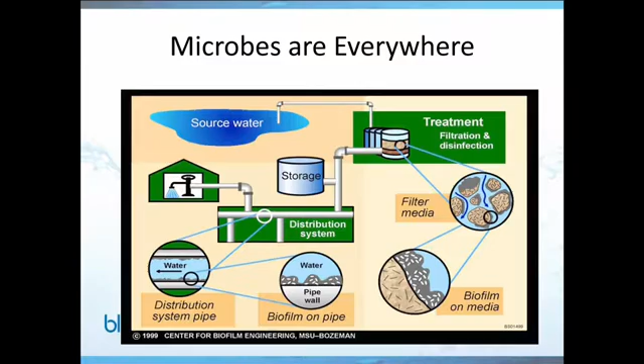But this slide right here just gives you a flavor for where you might find microbiological activity in your system: the filters, pipe walls, any storage systems, and so forth. And so this is really where we want to focus our presentation. So I'll talk a little bit about microbiology, and then we'll come right back to this, and we'll talk about the impacts that the microbiology has on the operation of your system.

Our goal here is to help you understand how to operate your system better and cleaner, so that you can avoid a lot of the problems that microbes present in your system. And you'll find that they underlie almost everything that you do in the water industry, just like they underlie almost everything that happens in the world around us.

It turns out that for every human cell that you have in your body, you have about 20 microbes. So for every human cell, there's 20 microbes. But the microbes are much smaller than your human cells. And so that amounts to only about a quarter pound, right? So you've got about a quarter pound of bacteria and other microbes in and on your body. So that's a lot if you think about it.

200 trillion microbes that you've been walking around with all of your life that you probably didn't even know were there. And there's about 1,000 different species of microbes that are in your own body as well. And if you look at just a square inch of skin, well, you can't see it, but there are on average about 600,000 microbes in a square inch of your skin.

So when you're looking at your distribution system and you think, oh, well, my distribution system's clean, it doesn't feel slimy, there's no overt problems here, I don't see any biofilm or any attached bacteria. In reality, it's all there, you just don't know it.

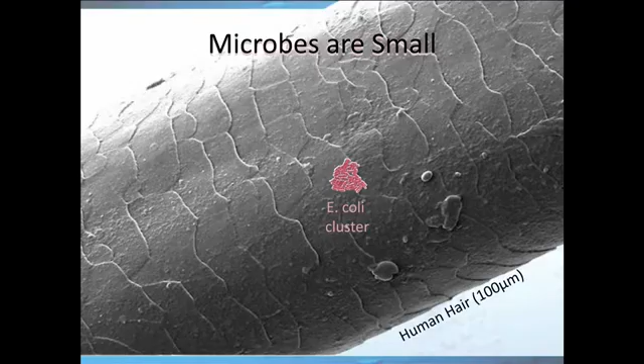So here's an example of the size, since you might be wondering how it is that you can get 600,000 microbes on a square inch of skin. Well, this is the cross section of a human hair. To give you a flavor, that's a cluster of about 100 E. coli bacteria. And so it's pretty easy to see, just looking at the number of hairs that you may have on your hand or your arm, that you can get quite a few bacteria on that surface and not really even notice.

And microbes in general, we're going to talk mostly about bacteria today. And bacteria will form what's called a biofilm when they're stressed. If you have bacteria and you apply a chlorine residual, there's a defensive mechanism which will secrete some sticky substance, and it will allow it to stick to a wall and to each other. It will allow it to protect itself from disinfectants and so forth. And so we see bacteria doing this.

In fact, bacteria can be found in space, they can be found in the deepest parts of the ocean, they can be found a half mile or more underground. If you take all the bacteria on the planet, the weight of it is more than the UK. So it's prevalent. The most common organic chemical that exists on the planet is cellulose, and that's what bacteria actually secretes when it secretes a sticky substance, and it's also what makes the cell wall.

And so this is kind of my primer, if you will, on microbiology. Let's just stop and take a moment and rethink how we think about these processes that happen in our water system, and recognize that microbiology plays a large role in it, more so than we attributed before. And so that's why I like this Mark Twain saying: it ain't what you don't know that gets you into trouble, it's what you know for sure that just ain't so.

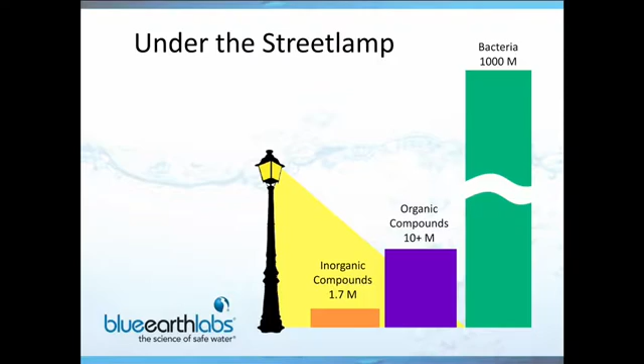And the same thing applies for the 1 billion different kinds of bacteria that's estimated to be on the planet. We have a very limited understanding of how they work, what they do and how they interact with the environment. What we can observe is the after effects of what they've done. For example, tuberculation. If you have iron and manganese in your pipe, you're familiar with these tubercles. Well, that's a phenomenon of bacteria.

Okay, and so you might ask yourself, well, I come up clean in all my tests. I don't have bacteria in my water. I'm not getting any positives on my total coliforms or anything like that. My water system's good, and that's good. From a health perspective, what you care about is the bacteria that's in the water column. And chlorine or chloramines do a pretty good job of taking care of the health problems associated with the water column. But only 1% of the bacteria in your system exists in the water column. The other 99% are stuck to the wall.

They're protecting themselves. They're essentially a little factory working to provide for themselves, and as a result, they have byproducts that they shoot off as well as their own children. So we end up seeing the development of bacteria. They stick to a wall, they start to secrete sticky material, and then they grow and continue to build until finally they're so big they need to send off some of the bacteria to move to a different location. And so this is the kind of operation going on in your system that causes some problems.

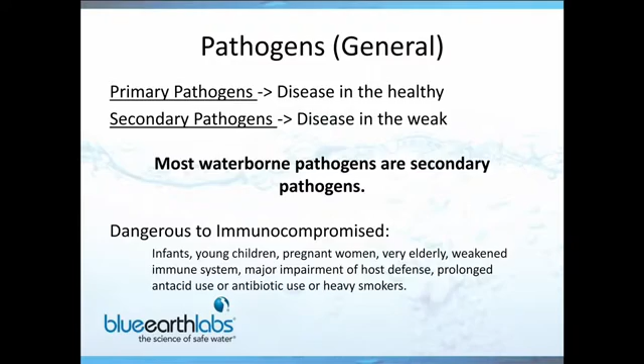E. coli is an interesting bacteria in that we have a bunch of E. coli in our bodies. In fact, we rely upon it to survive. It's what helps us to digest our food. There just happens to be a strain of E. coli that if it gets in your body, it'll tear it apart. And so E. coli is a fairly common bacteria.

Legionella is the same way. Legionella is all over the place, and there's one or two strains of Legionella that if it passes through your system and gets into one of your customer systems that has a hot water heater, then it can begin to multiply and you get outbreaks, things that you've seen in the news recently from New York and other places where people die.

Viruses, I mentioned, aren't actually living, but if they enter into your water system, they can pass and they can get entrained in the bacterial goo, the biofilm, and stay there long enough to eventually slough off and pass on to folks that drink the water. So even though they're not living, they can still cause a problem by simply being passed through the water system. And of course, we have other bacteria.

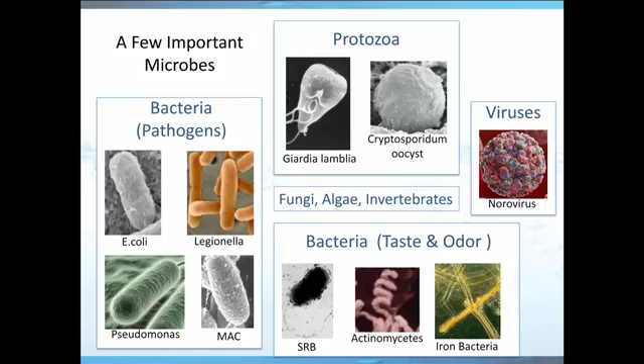So if you're looking under a microscope trying to determine the difference between these bacteria, you're not going to have much success. And so it's taken some fairly advanced techniques to be able to differentiate these different bacteria and be able to begin to understand what's going on.

All right. And our regulations are based on short-term exposure and long-term exposure. Short-term being pathogens. If you have any presence of these pathogens in your water, it's a big deal. For long-term exposure problems, you have annual averages. Okay, so you've got some in your water, that's fine, but let's not keep it in the water for very long, right? Let's clean it up, let's make it better. So it's more of a long-term exposure issue.

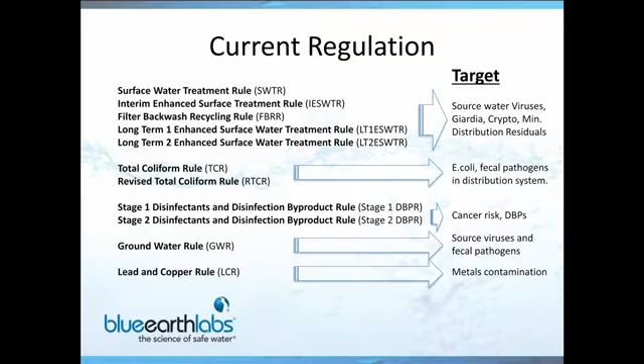And then here are some of the regulations and what their targets are. Again, these are all health-related, either pathogens, short-term exposure problems, or they're long-term, like your disinfection byproduct rules, or metals contamination, things that will accumulate and cause problems over time.

All right, so we've talked a little bit about bacteria, given you a flavor of what it is and how it exists in our world, and we talked a little bit about some of the health problems that are associated with it, but that's really not the focus of our meeting today. Our focus is what does all the bacteria in our system do to our distribution system? How is it affecting us operationally? What problems is it causing? How does it cause those problems?

All right, and so I think I've made the point that we really all have bacteria. There's no way around it. So anybody that comes to me and says, hey, we don't have bacteria in our system, well, you do. You just do.

All right, so the sources of bacteria are going to be any sort of intrusion event. Low pressure, if you have leaks or valve problems, you can get bacteria in. If you have a filter that's not operating properly and you're getting breakthrough, you're seeding your system in that way. If you have finished storage vessels, maybe you have an uncovered storage vessel. They're not as common anymore, or your vents are broken. Or even the wind blowing in bacteria that's on dust is another way for bacteria to get into your system.

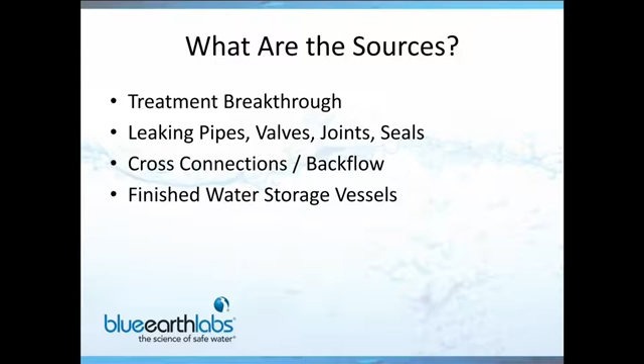So what ends up happening is you have a distribution system that has a lot going on. It's no longer just water with maybe some corrosion, lead or copper corrosion or something to that effect. You have biofilms forming, you have detachment, scale formation. It turns out that scale in a distribution system actually has a large amount of organic material built into it. Even if you have a hard calcium carbonate scale, like you might find in a cooling tower, it still has a high degree of organic content, somewhere between 5 and 20%.

And that organic content, guess where it comes from? It doesn't come from inorganic compounds. It doesn't come from the pipe walls. It comes from the activity of the microbes, whether they're in your source water and just passing through treatment, or whether they're generated in your distribution system. That's where it comes from. And so everything that you see in this pipe is bound together through organic molecules. A lot of stuff going on, not easy to predict, and this is why every water system appears to be different, because every water system has a different balance of these different mechanisms going on.

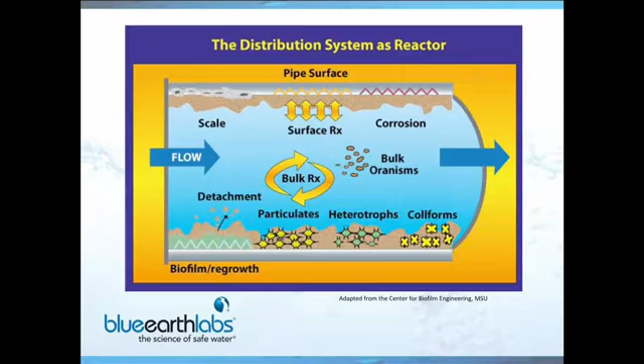I just threw this slide in to give a flavor for some of the things that microbes have a significant role in. It's certainly not an exhaustive list, but it does include things like corrosion and nitrification, water age and residence time. These are all microbiological issues.

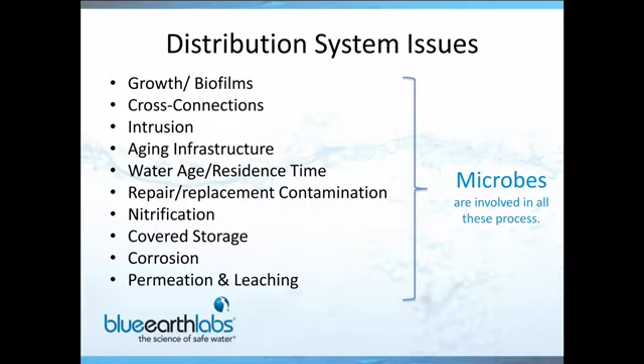And so what's interesting is here in the States, and I guess anywhere, when we first address problems, we're addressing the problems that we can understand, in the ways that we can understand how to address them. For example, for the lead and copper rule, there are certain requirements for phosphates or orthophosphate use. That works great because you can form a lead phosphate layer on a lead pipe and help protect it from getting lead into the water. But the problem with using phosphates is it's the same thing you'd buy in the hardware store to feed your tomatoes in your garden. It's a primary nutrient, and it will make it possible for life to grow. So you're encouraging microbiological growth at the same time that you're trying to suppress lead and copper in your water.

Same with ammonia. First of all, wells have natural ammonia. That's fairly common. But also, if you're running a chloraminated system, you're adding ammonia into the system purposely to suppress the chlorine enough to make it all the way out to the ends of your lines. And so that, again, is another primary nutrient. So depending on how we're treating our system, we may be causing ourselves more problems than we would have had otherwise. Of course, we're solving problems at the same time, so I'm not saying it's bad. But it's important to recognize that just our normal practice of operations tends to encourage microbial growth. So residuals and disinfection byproducts.

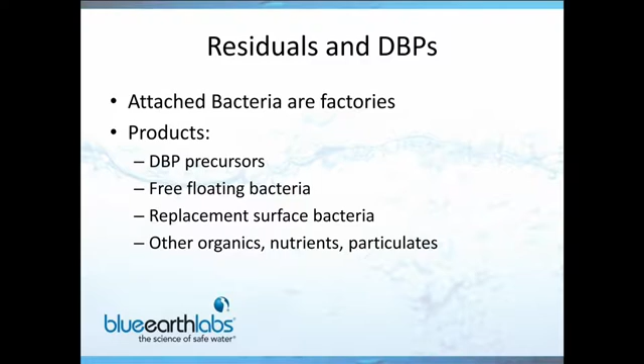I want to get back to this idea that attached bacteria or biofilms really are factories. The bacteria will clump together and protect themselves, and then they'll also feed themselves one way or another. And bacteria will eat anything. So whether you're feeding it through the water column, or it's taking its energy from the pipes itself by harvesting iron, it's using the available energy around it to produce more bacteria and to produce byproducts. Some of those byproducts are disinfection byproduct precursors. Others would be additional free-floating bacteria, causing your chlorine residuals to drop. Or your residuals are working on the surface of the biofilm, trying to break it down, reacting with it, and it's just replacing the bacteria up to that surface. Or there's other organics and nutrients and particulates.

Biofilms in general are interesting because as you get a mature biofilm, they can actually develop circulatory systems. They're almost like animals. You get multiple bacteria, kind of like a hydroponic fish tank in a growing farm, if you've ever seen this, where it just recycles from one organism to another. The same thing happens in biofilms. They're almost self-sustaining when they get together.

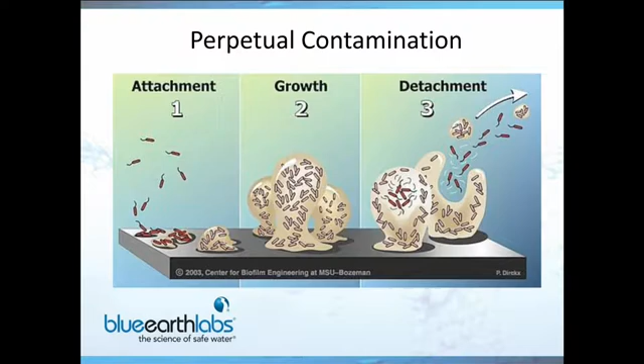And so as you see over time, if you think of water age, a lot of water age is simply your residual reacting upon the bacteria that's being generated in these factories. And so likewise, what you see is a drop in residual as you go from the treatment plant out to the ends, and you see the disinfectant byproducts increasing.

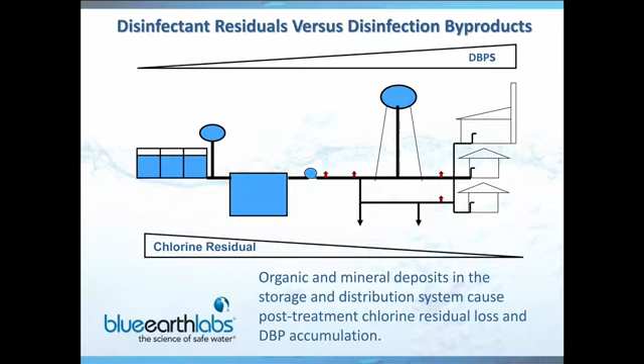Corrosion is really governed by films. All kinds of corrosion are really governed by the kind of film that is on the surface of the metal, right? And those films can be formed in a couple of different ways. Uniform corrosion is a film. If you're familiar with aluminum, right, they use it to make sports cars.

Aluminum is actually one of the more reactive metals on the planet, but it has a very effective film that's formed by uniform corrosion. As soon as oxygen hits it, it forms aluminum oxide, and it's basically inert at that point. So you have this inert film on top of a highly reactive metal, but the whole thing is inert for practical use. Well, the same thing can happen with metals. You can get a film that develops and it protects it.

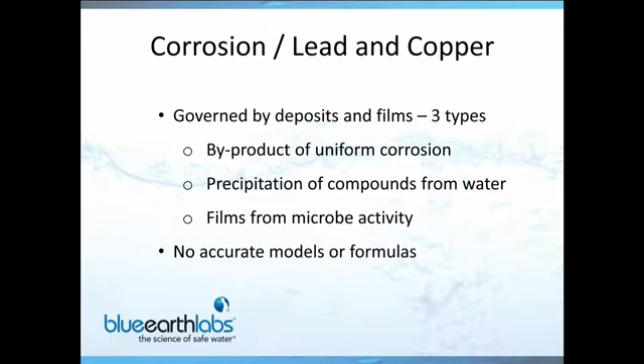Well, any precipitation of compounds, iron, manganese, any other metal compounds, if they precipitate out of the water and they land on these films, they have chemical reactions and can result in different behaviors. Likewise, microbes will also form films, just kind of like we've been describing. And they also will have an effect on whatever kind of uniform corrosion is existing. This is a very complex problem, and there's really no good, accurate model or formula.

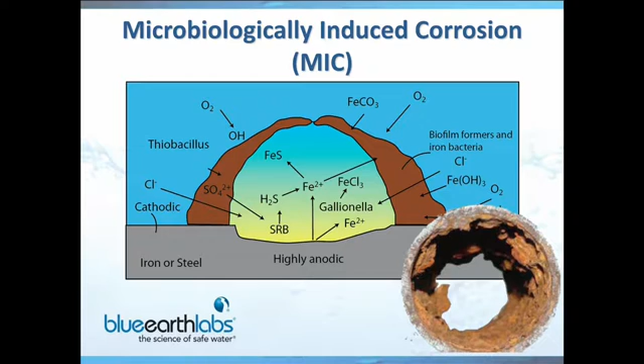Here's some of that tuberculation we've been talking about, and here's a few of the different chemical reactions that exist in the tuberculation. Here we see microbiologically induced corrosion, where we're actually pitting the metal because the bacteria is using the pure metal and oxidizing it. That's a source of energy for the bacteria, and it's making use of it to live, to grow, to power its factory. And as a result, we're drilling right through our metal, and we're producing the byproducts, which also cause a problem when it comes to flow in our system.

Here's some examples of pits in pipe. You can see these little holes right here. It looks like somebody took a hole punch and just jabbed it right through. But those are microbiologically induced corrosion.

Additionally, when you have iron and manganese tuberculation, or any kind of particulates of iron and manganese, they're very good at sucking up the bad metals that you find in your system: lead, arsenic, and copper. And so those metals will very quickly attach themselves to the iron and manganese. So you may think, well, iron and manganese, it's a secondary contaminant. It's not a health problem. I'm not really concerned about it. It's a nuisance, but it's not a big deal.

The problem is when you have a flush or a high flow through a system that's got iron and manganese, you also have high surges of lead and arsenic or whatever else is normally fairly low, but it's been concentrated on these particles. So you can get very high concentrations depending on how you're sampling.

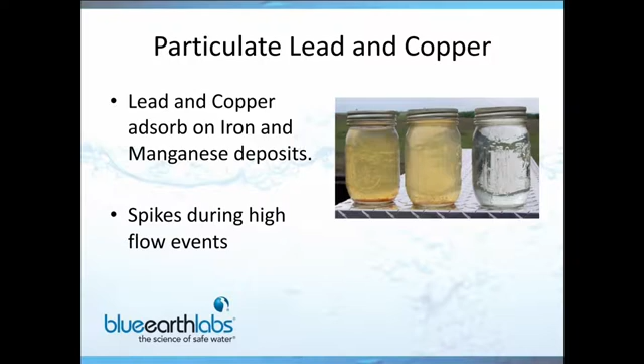The things we've been talking about, these films, these deposits, these bacteria, you've seen the tuberculation. That will all interfere with flow if it builds up too much. And if you have valves or you have meters, the valve operation will be hampered. You'll get out there to shut the water off and you won't be able to. You'll find that your meters slow down as they become accumulated with deposits.

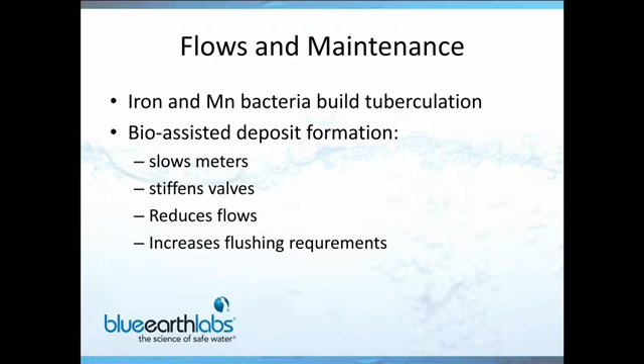You may get 2, 3, 4% decrease in the amount of money you're able to charge for the water. People are getting free water from you because your meters are slow because of deposits and so forth. And you have increased flushing requirements. When you go to do your spring or fall flush, your system will take longer to clear up and turbidities will be higher.

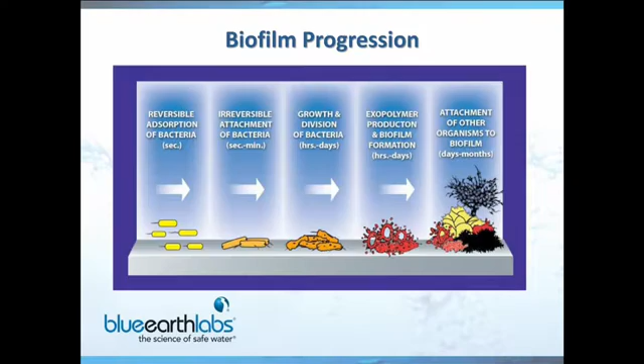So this is just a refresher of the same kind of theme that we're talking about. Start off with simple bacteria, but you end up with an accumulation of problems that result in either water quality or operational problems. And so then the question is, what do we do about all of this? Well,

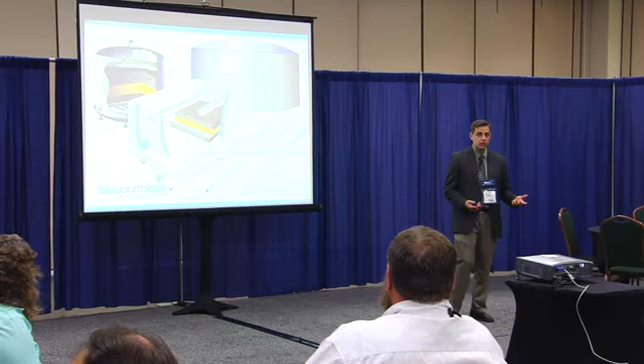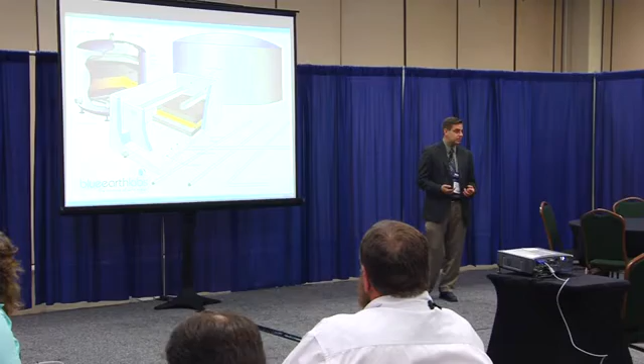for microbes, of course you might think, well, let's put in more disinfectant, right? Because disinfectant kills bacteria, and if bacteria is the root of all problems, then if we put more disinfectant in, we'll solve our problem. Of course, there's a downside. You're limited on how much you can put in, and there's taste and odor problems that come with using too much chlorine. And let's face it, the bacteria are really good at protecting themselves from chlorination. So instead,

what we can do about it is we can simply just clean the system. If you have a tank or a filter or air scrubber, or something like that, you can just take them out of service. You can apply a cleaning chemistry. At Blue Earth Labs, what we do is we design and build these chemistries and sell them for the purpose of cleaning systems. So we have the ability to clean all of these different structures.

Now, with piping, it's a little bit different, right? With pipes, you can't just take them out of service, and you really don't want to throw a bunch of chemistry in there, because who knows if you're going to get it all out with your valves causing you problems, right? You don't really want to put a lot of chemistry in there if you can avoid it.

So we have a product called Claritas, which does a very effective job over time of cleaning out these systems, and it cleans it out by getting rid of the glue, essentially, that's holding all of these deposits together. I may have mentioned earlier that the deposits are interwoven with organic material, not necessarily living material, but organic carbon, hydrogen, organic molecules. And that's what Claritas will go after. And we'll see a little bit of that as we go through some of these slides.

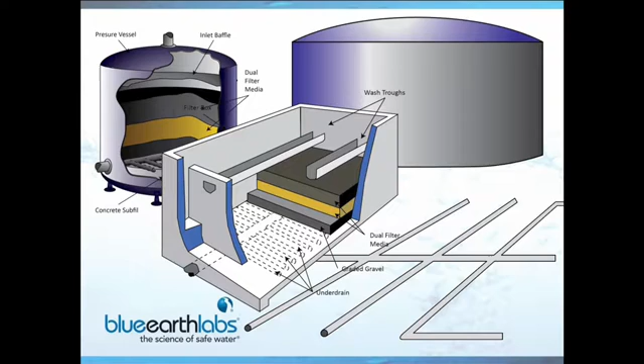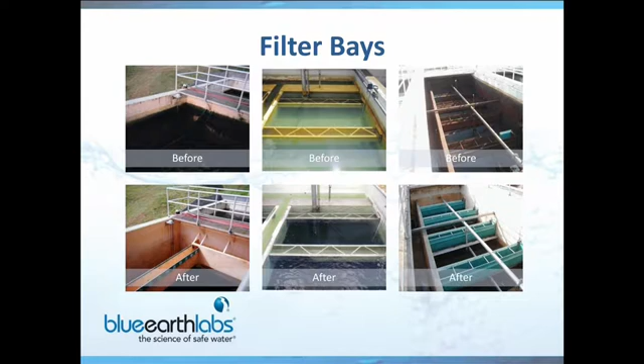Here's filter bays, same principle. We've got befores at the top and afters at the bottom. This is just a simple spray application, and it dissolves these deposits and breaks them down and gets rid of them. Filter media, we have a very high surface area on filter media. That's why we use it.

But when it gets dirty, when there's bacteria attached, remember 99% of your bacteria is attached to the walls of your water system. When they're attached to the media, they become a problem. They will add precursors for disinfection byproducts into your water system. They will allow bacteria to slough off and make it through. They'll interfere with the operation of the filter.

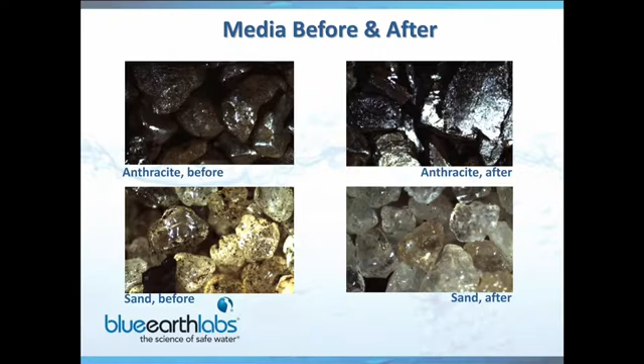And so if you're able to clean the filter media by simply applying some cleaning chemistry in one day and bring your filter back up to new, then you're able to operate your filter the way it was intended to. And you'll have better water quality, and you'll see those effects all the way through your system. So you improve operation performance, improve water quality, as well as reduce the amount of maintenance you have to do. You won't have to change out your filter media if you can clean it yearly. And you'll be able to have like new filter performance if you clean it on a regular basis.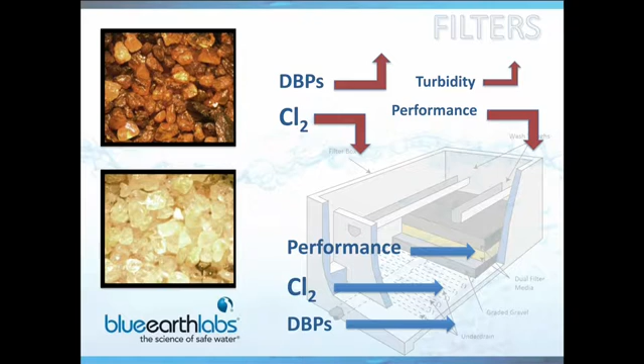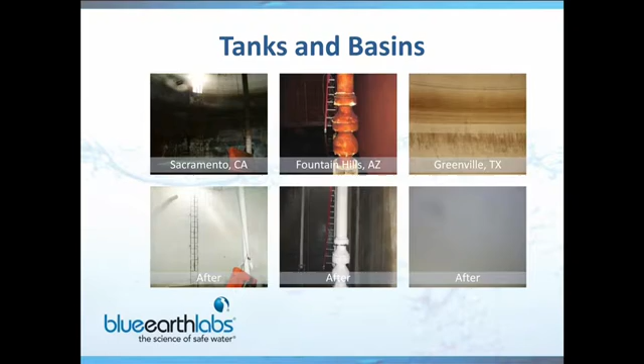We had one bad tank that we took the time to actually measure the residual drop in this clear well before we treated it and then after we treated it. And so for the 22 hours before we treated it, we lost 94% of the free chlorine. That's a large drop for a clear well. Okay, so this is an extreme example, but it's here to show you what can happen if you let your system go. So we had a 94% drop just in contact with the walls of the clear well.

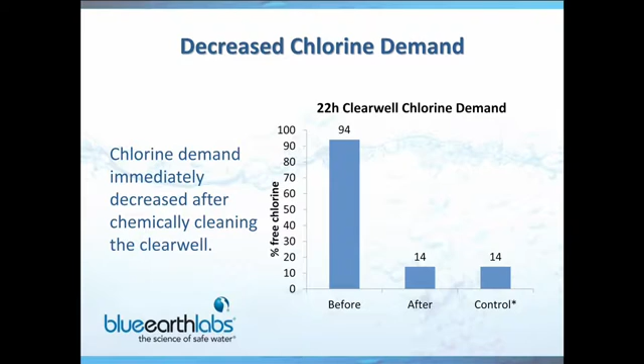Then after cleaning it, we lost 14% in 22 hours. And then this is just a clear jar, a glass jar, that we also used as a control to find out how much would drop in a clean situation. And so we see about the same.

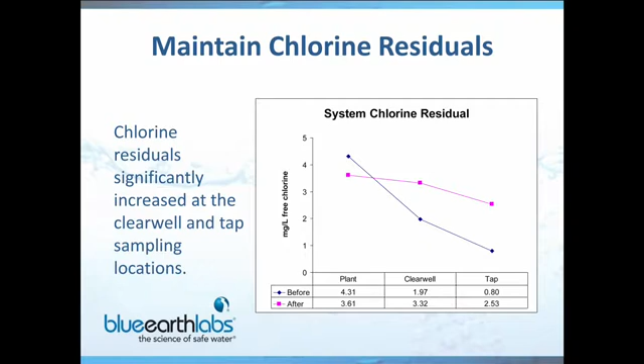And likewise, if you'll see the clear well, after cleaning, we're able to maintain a much larger residual out of it and then into the tap. So you see, this is the after, this is before. Much larger drop across from the plant, the clear well, to the tap beforehand. After cleaning, we're able to pass that good water quality all the way through to the customer.

Distribution systems, we talked about what makes up all of this accumulation, all of this gunk. But now we need to talk about how to get rid of it. And it's not an easy thing to do. If you're going to pig it, that's fine. It'll move the large, massive material, but it's not going to be able to clean the bacteria that's off on the sides of the wall. It's not going to clean it in such a way that's going to prevent it from causing you water quality problems. It'll improve it, no question.

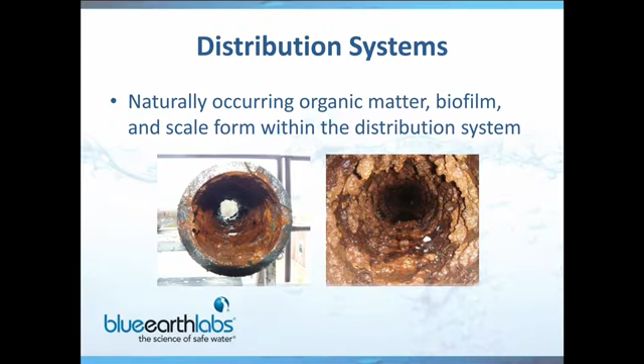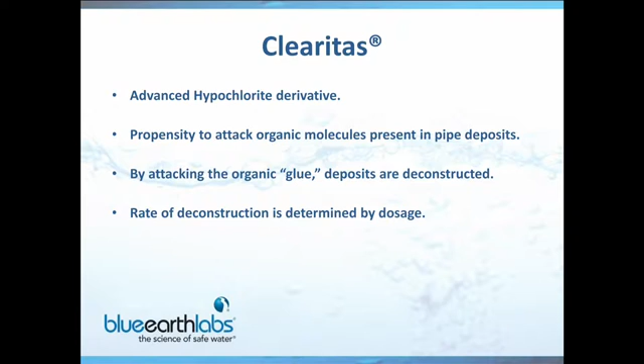So Clearitas, I mentioned, it's an advanced hypochlorite derivative, right? So it's based on kind of a bleach chemistry, so it's something that you're somewhat familiar with, but it's been modified to attack the organics that hold all of this stuff together. So you really don't need very much of it because it attacks the components that hold the deposits together. So we might dose, on average, just a few parts per billion of active ingredient into your system, and it works quite well. And how fast it works is determined entirely by the dosage that you use.

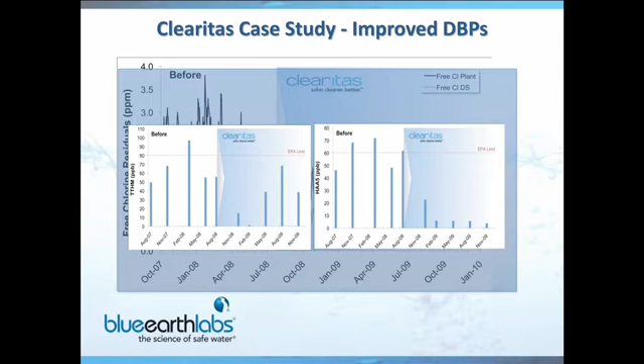And as a result, I mentioned that chlorine and disinfection byproducts are related. In this case, you have THMs dropped a fair amount afterwards. The HAA5s dropped significantly afterwards. And this is an indication that the precursors for the THMs were probably from the source water, or they're from something prior to the distribution system. Whereas in this particular case, remember every case is different, it looks like the precursors for the HAA5s were probably heavily generated in the distribution system. And that's not always the case, but it was in this one.

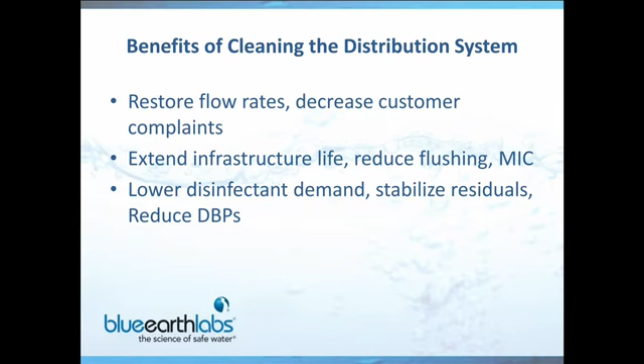When you take the time to clean your distribution system or any other component of your system, you receive a variety of benefits, just like what we've been talking about. Just by addressing this one issue, you can improve your corrosion rates, you can extend the life of your infrastructure, you can improve your flow rates over time, certainly reduce customer complaints, and improve residuals and reduce disinfection byproducts. So now that we're understanding where a lot of these problems are coming from, and that they're coming from the microbes, if you can work on those and understand them better, you can more effectively improve the operation of your facility, and as a result reduce the amount of money that you have to spend all over your system.

All right, so we're drawing to the end of this talk, and just wanted to reemphasize the importance of microbes, not only in water systems, but in everything that we do, right? And nearly all of the water problems that we have can be traced back to microbes, whether they're the original source of the problem or they simply exacerbate the problem. So the goal here is to keep the system clean.